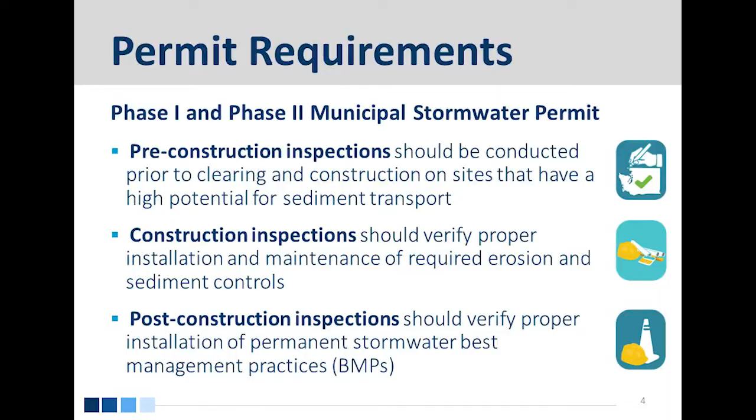And also keep in mind that as an alternative, you can just inspect all sites before construction. So in Tumwater, we're not fully implementing it yet, but that's what we've elected to do. We think that making sure those temporary sediment and erosion controls are installed appropriately at the beginning of construction is important to make sure that they're managed throughout the entire construction process.

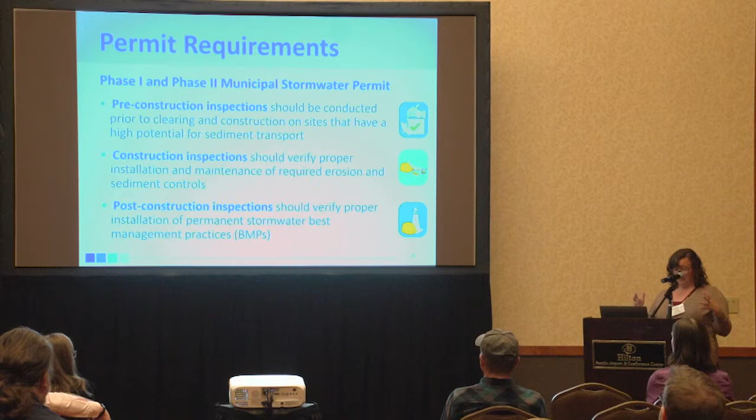And then during construction inspections to verify proper installation and maintenance. It's supposed to be on all sites during construction, but there's no specification of how often you're going out and doing those inspections. So as a local jurisdiction, you're supposed to set up what your program looks like and how often you want to do those inspections.

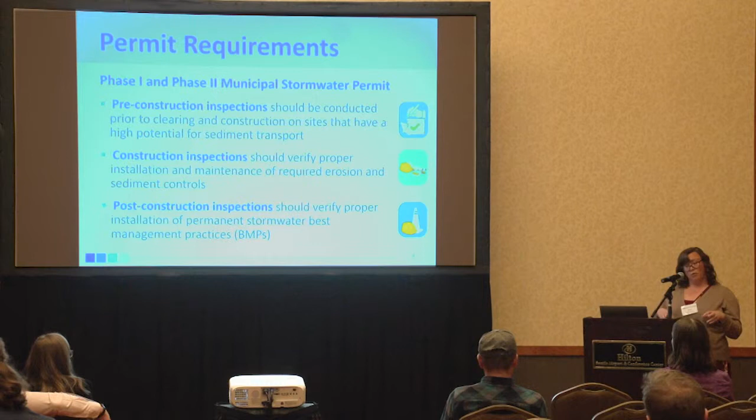And then the post-construction inspection, where you're supposed to inspect all permitted development sites upon completion of construction prior to final occupancy. We seem to struggle with that one quite a bit. Final approval or occupancy. And then you're looking at the permanent facilities, but you're also making sure that the temporary erosion sediment controls that are appropriate to be removed at that point in time have been removed and that the site is finally stabilized.

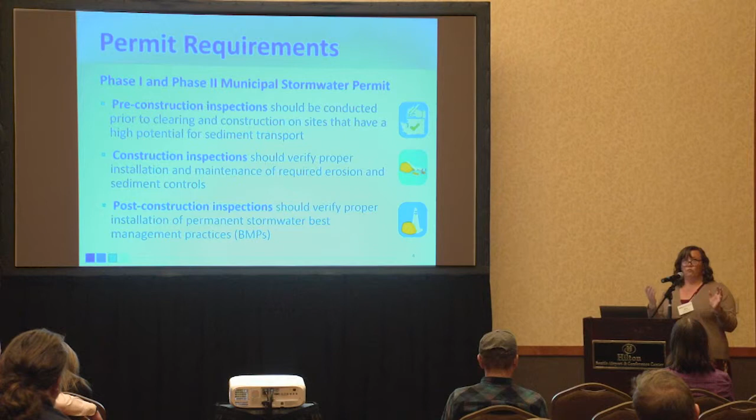And then compliance is 80% of what your jurisdiction has set up for how many of these inspections they want. So in Tumwater, we're doing a monthly inspection frequency. We do additional inspections if we need to do follow-up for enforcement or something like that. And we're working on redeveloping a lot of our processes right now to better document some of this stuff.

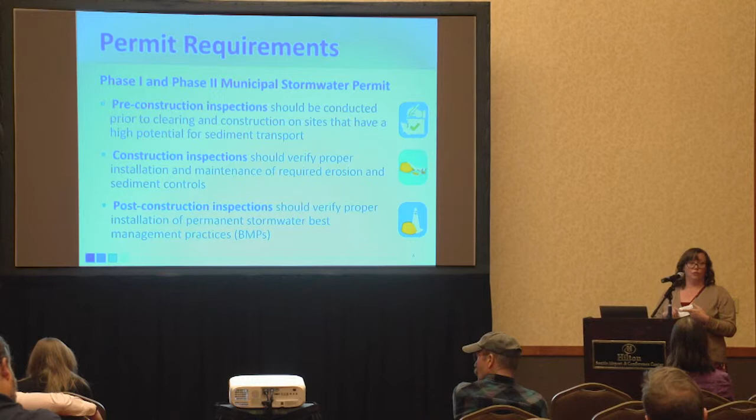And so part of what we're hoping to get to is looking more at doing after storm and around the weekend inspections. Right now, we're not really focusing on that. We're just trying to hit that minimum bar, but we'd like to move into doing inspections during more critical time periods.

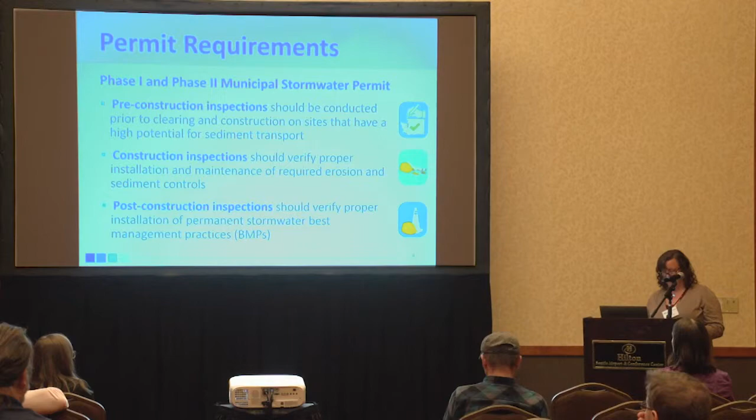So a little bit of the project overview. We got a grant of regional or statewide significance, a GROSS grant.

Whoever came up with that acronym is one of my favorite people. I think that's hilariously awesome.

So our original proposal was to develop just 3 checklists: pre-construction, during construction, post-construction. And the reason we were doing this, because there's a lot of construction inspection checklists out there already, right? But a lot of the reason why we were looking at doing this is because of the new LID requirements. And not a lot of those were being included in the construction checklist that we had. And we were also seeing that those facilities, the permanent facilities, are not being constructed to the standards, and then they're not functioning as they were designed to.

We met, Tumwater and Herrera met, I think, initially, and then we had 2 working group meetings with the Thurston County Storm TAC, which consists of the cities of Olympia, Lacey, Thurston County, and Tumwater. Herrera also did a survey before all of this, which I think will be on the next slide too. And then they came up with 2 fact sheets, one for Western Washington, one for Eastern Washington, and they did 6 trainings, which were all in Western Washington.

So I want to go through a little bit of the survey results. So Amy mentioned that we did a survey as part of this project, and we reached out to a bunch of the permit coordinating groups. We ended up with 45 responses to that, so it was a pretty good response rate. 40 of those were from Phase 2 permittees, 3 were from Phase 1s, and 2 did not specify, but we covered responses from 13 different counties in Washington, so both Western and Eastern Washington.

From that, we got a pretty diverse audience, split between inspectors, construction site stormwater inspectors, NPDES permit coordinators, people that manage or oversee inspectors, and then in the other response, those were generally people that served in more than one of those roles. So smaller jurisdictions, you may be wearing more than one of those hats, and just one building inspector out of that group.

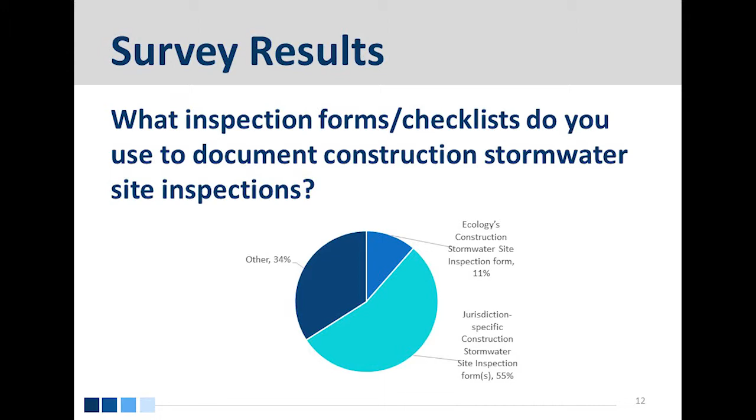Looking at inspection forms and checklists that are currently used to document construction stormwater site inspections. So only about 11% of the respondents used Ecology's construction stormwater site inspection form, and we thought that was kind of interesting. I thought that was maybe more widely used. About half used a jurisdiction-specific construction stormwater site inspection form. And then the other responses included proprietary software, personally developed forms and checklists, handwritten notes, and information received from submittals such as site erosion control plan, drainage control plan, things like that.

One of the questions we also had on there was, how do you currently track your construction site stormwater observations? So here, this is a pretty interesting distribution. So 29% are still using a hard copy form checklist, 27% electronic, so fairly good split there, 22% relying on field notes, and then the other responses included, again, proprietary software associated with inspection tracking and permit systems or databases.

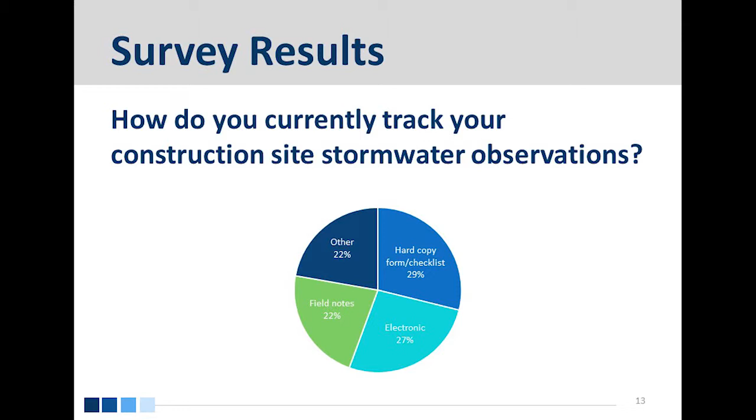And a lot of jurisdictions also have a dual approach, so they have electronic filing of hard copy reports and then possibly separate forms that they would then use for stop work orders and corrective actions, things like that.

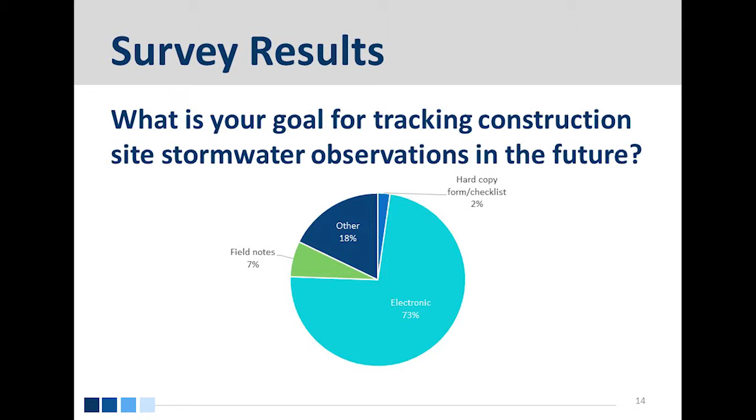The goal for tracking construction site stormwater observations in the future, and Amy mentioned this, so a large percentage, 73%, wanted to switch towards using electronic forms in the future. One person wants to stick with their hard copy forms there in the 2% category. 7% prefer field notes, and then the other responses are 18%. So I don't think I have the other responses there for that one. But yeah, strongly towards electronic in the future.

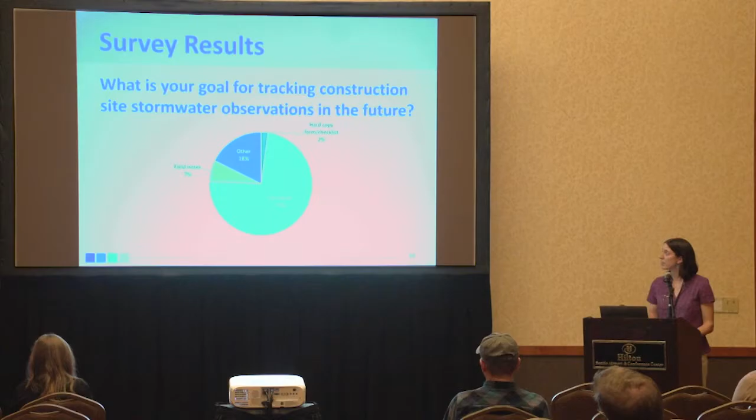So that was our initial survey, and we used that to drive the information in the checklist as well as the meetings with the Storm TAC, the regional group in Thurston County. As Amy mentioned, we started off with the goal of 3 checklists, and that morphed into 5 checklists. So 3 of these are focused on erosion sediment control inspections for the initial, during construction, and post-construction phase. And then the permanent stormwater BMP facilities focused on the during construction and the post-construction phase.

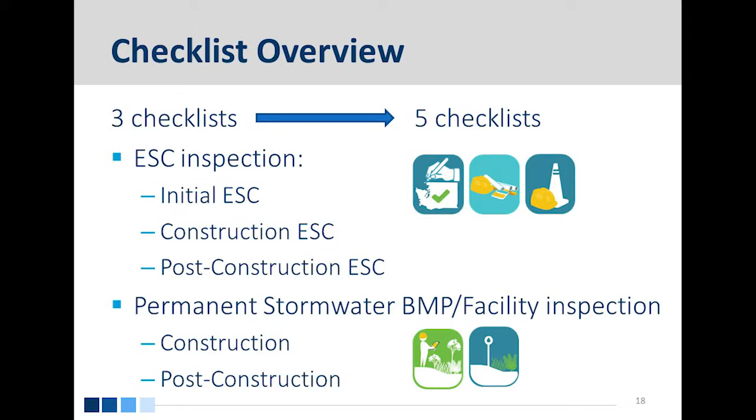And the discussion we had with that regional group is that's often 2 different inspectors that would go out. You have one inspector that's focusing on your erosion sediment control, and that could be a different inspector or engineer that would be focusing on those permanent facilities. So making sure we covered both those roles. At a small jurisdiction, that may be the same person, but it could be helpful to track those things on 2 separate forms.

So an overview of what's contained in all 5 of the checklists. They all have a short objective statement at the top, a section on project information, inspection items that are generally grouped by construction SWPPP element, so the elements 1 through 13, and examples of BMPs.

This was something that came up on the City of Olympia's form that the group really liked, having those examples, especially for a new inspector or someone that's learning the ropes of inspections. It's good to have that reminder of what are we looking at for this element. If I just say element number 4, what does that mean? Having some examples there so you know what to look at. Notes, comments field, and also a summary of corrective actions.

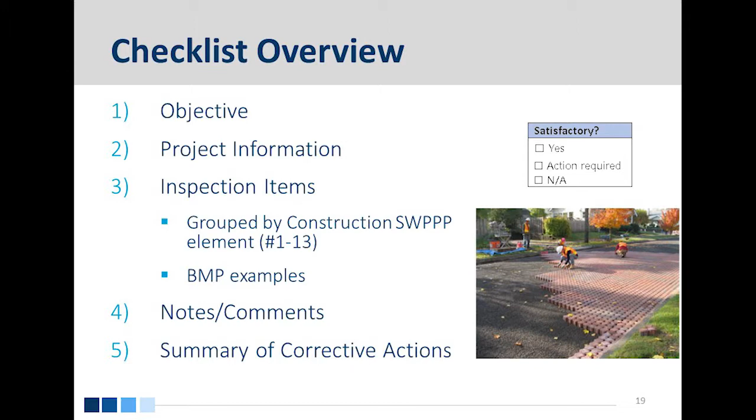So here's just the first page of the initial erosion sediment control inspection, and I guess we could probably just pass these out at the end. Or do you want to pass them out now? Yep, you can pass them around now. So we've got packets that Amy will pass around. I think I have about 16 copies, so feel free to share if you don't get one.

But we'll walk through what's contained in each checklist, and these are also available online in both the Word format and an editable PDF format, so you can take those and modify those and use those in your programs. So the first one on there is the initial erosion sediment control inspection. It's just a front and back, 1 page. Try to keep this fairly simple, fairly streamlined.

The objective here, as Amy mentioned, the initial erosion sediment control inspection should be conducted after the pre-construction meeting and installation of temporary best management practices, but prior to any clearing, grubbing, or grading at the site. This inspection is required for sites that have a high potential for sediment transport. So kind of linking back to the permit requirements.

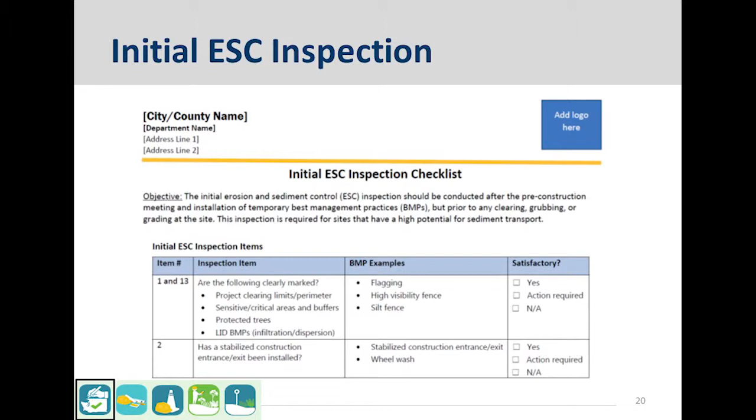This whole top part of the page here is your project information, your property owner information, your inspector information, contractor, and your CESCL information. So making sure you have all that documented. And then our initial erosion sediment control inspection items are at the bottom of the first page and the top of the second page. And then there's quite a bit of room for your notes and comments there.

And as I mentioned, it's generally grouped by the construction SWPPP element, inspection item, your BMP examples, and then a place to check everything looks good, it's satisfactory, action is required, or not applicable. And if you do check action required, at the back of each checklist, there's a summary of corrective actions table where you can fill out what actions are needed and when that's completed. So that's the first checklist.

The second one in the packet, probably the bulk of your work, is this during construction erosion sediment control inspection. So this is a 4-page checklist here. So again, our objective here at the top is inspections conducted during construction activities should verify proper installation and maintenance of required erosion sediment control BMPs and the protection of permanent stormwater BMPs facilities.

So even though we created that separate set of checklists for permanent BMPs and facilities, we wanted to still make sure that the erosion sediment control inspector was checking for those things because they may be out there more frequently. They can notify the other inspector that there's an issue that may need to be looked at. So we wanted to make sure we had that tie-in. So again, similar project information you fill out at the top. Here below the line, there is a difference.

Is inspection occurring after a holiday, on a Friday afternoon, before, after, or during a storm? So those are things that key in certain things that you might need to look for. We had originally folded that in later in the form, and there was a spot in the Ecology form for, like, is it raining today? How much rain? Things like that. And well, we thought, you don't really need to know that. You can look that up later if needed.

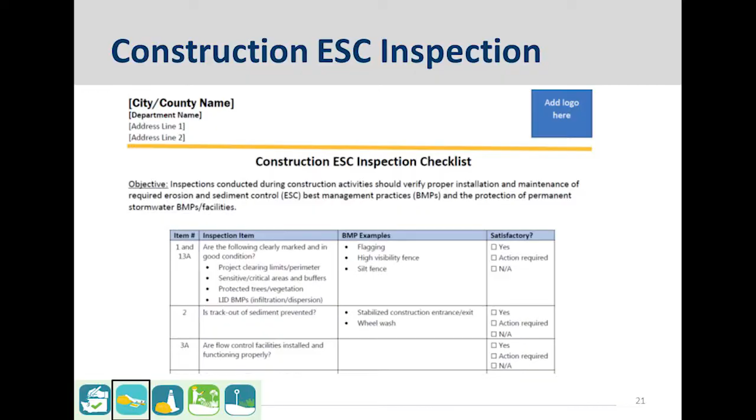The middle 2 pages are really where the bulk of the inspection information is. So similar to the first checklist, we've got our construction SWPPP element here, what we're looking for in terms of inspection item, some examples of BMPs that fall within that category, and then whether things look good or action is required. And on the back, there's your spot for notes and comments and summarizing your corrective actions.

And the one difference on this checklist that you won't see on the other checklist is at the bottom of the 4th page. Was water quality monitoring part of this inspection? This was something we debated over with our regional group, and some required collecting turbidity and pH samples and others did not. So we wanted to make sure we at least had a template included in here. If that's not something you require your inspectors to do, you can just pull that right out. But if you want to have a space to record those observations, we wanted to make sure that we included that in there.

All right, the post-construction erosion sediment control inspection is the 3rd one in your packet. Again, we've got 1 page front and back, so trying to keep this simple. So again, we've got our project information at the top. A couple things to point out here are tying into, has the required documentation been submitted to the city or county prior to formal project turnover?

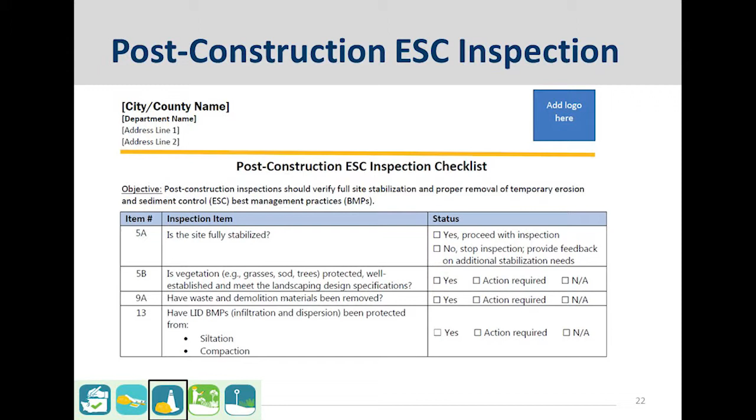So this is one thing that we've noted with a lot of jurisdictions we work with, that there's not always the handoff of the information. So if someone's signing off on the final inspection, oh, we don't have our O&M plan or something like that in place. So just as a reminder, check and make sure all the required documentation's been submitted before you final the inspection. Some of the jurisdictions we worked with required a stormwater drainage system cleaning at the end, so we added that as kind of a reminder.

And then if you've got any upcoming permit or bioretention or permeable pavement infiltration testing, or if you've got a 2-year maintenance bond that you want to then go out and check later, there's kind of a reminder spot in there for that. The important thing here on the post-construction erosion sediment control inspection checklist is this first inspection item, 5A, is the site fully stabilized? And this was something that Amy mentioned and something that came up in our discussion.

If it's not fully stabilized, you don't want to go ahead and spend all the time to fill out the rest of this form. That's something where you just say, it's not fully stabilized, I'm going to stop my inspection, provide feedback on what's needed, and come back later to fill the rest of this out. It's not worth filling this whole thing out if the site's not stabilized yet.

One thing that came up during the trainings that we thought was interesting is the definition for fully stabilized is not included in either the permits, phase 1 or phase 2, or the Stormwater Management Manual for Western Washington. If you do go and look at the construction stormwater general permit, there's a definition in there for fully stabilized that you can take a look at. It's in the next version. All right. It's been addressed. Thanks for that input. So it sounds like in the 2019, there'll be a definition in the manual or the permit? In the permit. Okay, great.

All right. Someone listened to what I was saying in one of my trainings, maybe, yeah. Or you knew that was an issue, so that's good. Great. So there will be a definition forthcoming.

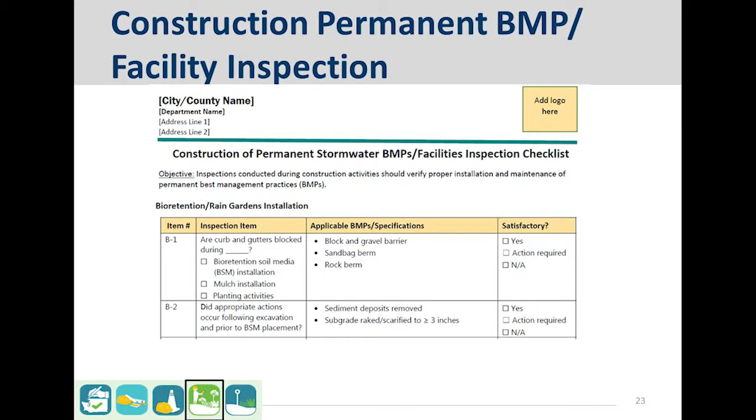And then, try as I could, I couldn't get permeable pavement to fit on one page. I really tried, but came up with 13 items for permeable pavement because it is a little more complex in terms of the installation. We want to make sure you're hitting all those milestones. So pages 4 and 5 are all about permeable pavement. And then on the back, we've got plenty of space for notes and comments and corrective actions there. So that's number 4.

And the last one is our post-construction for permanent BMPs and facilities. And this one is a 3-pager. Again, here we're looking at proper installation and maintenance and performance of your permanent BMPs. Again, we've got this tie-in to, has the required documentation been submitted? Are there any upcoming inspections I should note?

On the bottom of page 1 is looking at your protection from siltation and compaction, proper soil amendments, vegetation and mulch. Page 2, there's a lot of information on page 2, so make sure you look at that. That's looking at bioretention, making sure everything's been installed properly. If you're doing an infiltration test, there's room to document that there.

Permeable pavement's kind of divided into 2 categories here. There's slightly different requirements, whether you have a permeable pavement driveway or a road or a parking lot, what you can do for infiltration testing. So that's divided into 2. If you have just a driveway, you can do a 5-gallon bucket test. If you've got a road or parking lot, then you're triggering the ASTM C1701 or 1781. 1701 is for concrete and asphalt, and 1781 is for pavers.

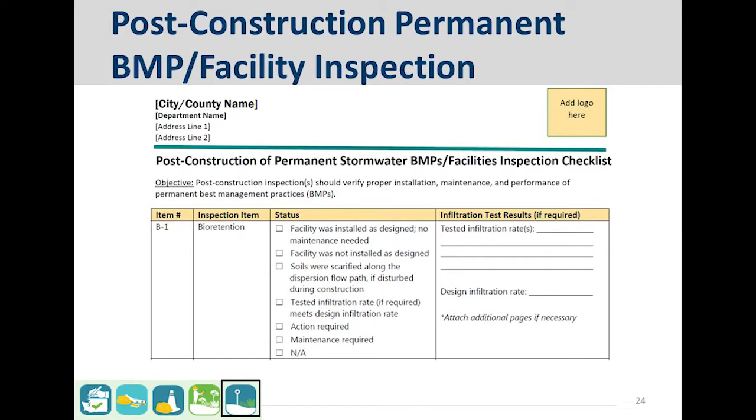So that's where you have the 12-inch ring you put on the pavement with your plumber's putty around the edge. You've got calibrated buckets that you're pouring in and trying to get a constant head to look at what your infiltration rate is. One thing I wanted to note is we also had some debate over infiltration testing. Not every jurisdiction requires that. Wanted to make sure we had some basic guidelines there if you do require that or want to require that in the future. But that's something that's definitely flexible based on your inspector needs and requirements there.

At the bottom of the page, you'll notice there's one line for all other permanent BMPs and facilities. So this is one we discussed with the group that, if we had more time and more budget, we would definitely flesh this out a bit more. There may be some facilities that you commonly see, whether it's ponds or vaults, so you may want to adjust that one to meet some of the common facilities that you see. But generally, everything else is kind of covered in that bottom line there. And then page 3 is all your notes and comments and corrective actions.

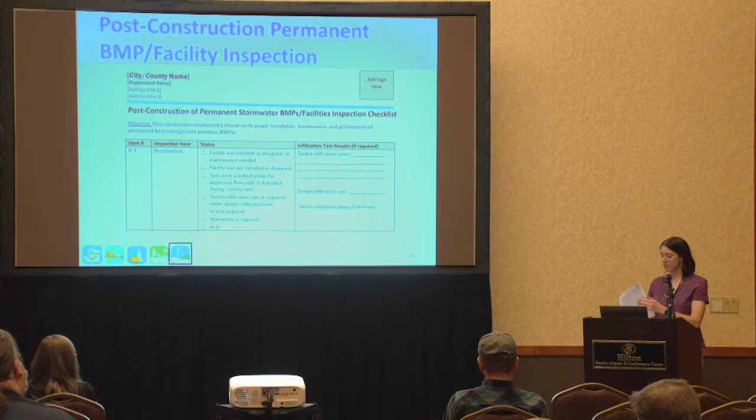All right. Oh, and I also wanted to point out, we think we'll have a little bit of budget left at the end of the project to develop at least one, if not more, of these in electronic format. We had some feedback from the trainings. We brought a little demo of an electronic form in Survey 123, and there was some interest in that. So that's something that could definitely streamline your process as well. So that's something that we're going to look at too for wrapping up the project.

So a little overview about the training. We had 6 trainings total. And as Amy mentioned, all the way from Edmonds down to Vancouver. So those were from November last year to March of this year. We just wrapped up the last one in Vancouver. We had 193 people that attended those. The first 3 were actually at capacity. We didn't charge, so it was at capacity. And we had 56 different jurisdictions attend those. So I think that was pretty good in terms of distributing the information. And a lot of fun.

I also wanted to point out that if you attended my earlier talk on ditch maintenance, on that flash drive, all the files are also on there. I was hoping we'd have some extras, but they went like hotcakes at the last presentation. So I did bring 4 sets of the training materials. At our trainings, people really enjoyed that activity. So if you have a group of inspectors and you want to walk through that activity, I have the laminated copies of what we used at that training. I've got 4 of those up here, and a few more back at the office if you're interested. But all those you can also download and print, or print off the flash drive if you have one of those.